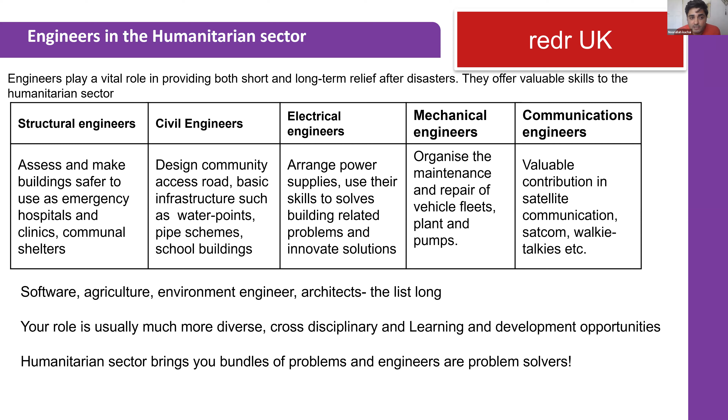Next one. How does it go?

Okay, so I started working as a shelter officer. I was providing houses for the displaced, internally displaced, and those who were returning back from Iran and Pakistan to Eastern Region, 4 provinces, Nangarhar, Jalalabad, Kunar, and Laghman provinces. We were providing 2-room semi-permanent shelters. Semi-permanent, they are called because sometimes the affected families would want to return back to their place of origin.

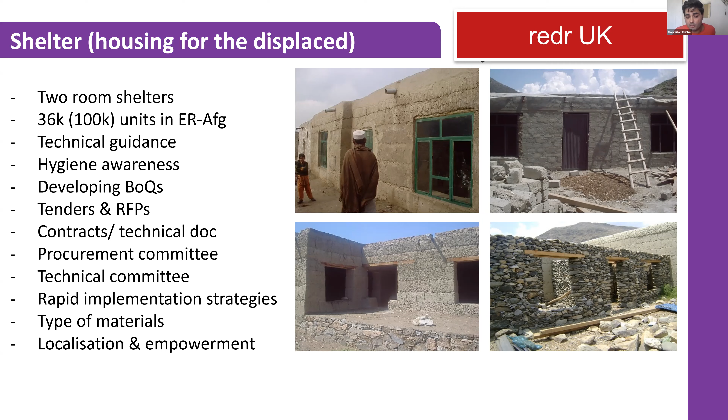So what you need to know is that when you're working with the aid agencies, you really need to have this rapid implementation strategy. Things happen rapidly, and you need to provide rapid response, quick solutions, and immediate action, especially in the first 72 hours. And the main focus of the aid agencies are mostly localization and empowerment. So try to use the local resources as much as possible, and try to enhance and strengthen the local skills that are available.

I was responsible for implementing several quick impact projects or cash for work projects that included several reintegration projects, protection wall, pipe schemes, water points, micro hydropower, school buildings, community centers, and women empowerment, GBV, and human rights projects. Now, why were we doing infrastructure projects in the villages? Because we were using the infrastructure projects as gateways to enter the villages, and then we could implement sensitive projects. You just can't go to a village in a remote location and say, oh yeah, here we are, we're going to implement a literacy project or a human rights project or women rights project.

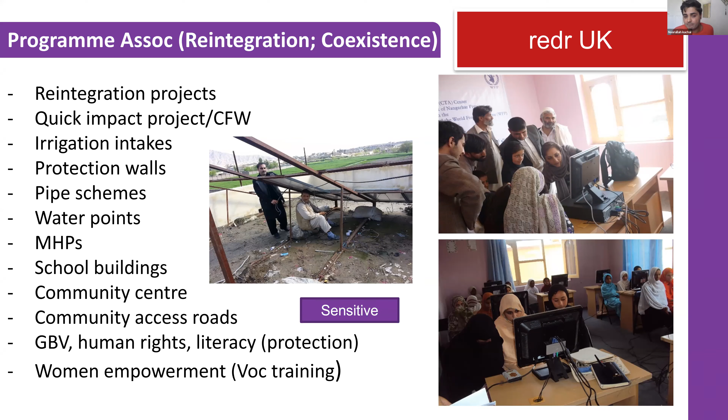So what you would do, you would go with a package of construction project or infrastructure project. You say, we are going to do this reintegration, irrigation project, but it has another component of women empowerment, and we are going to provide vocational training for women. So this will upskill the residents and the affected population, and it will bring them chances of livelihood opportunities.

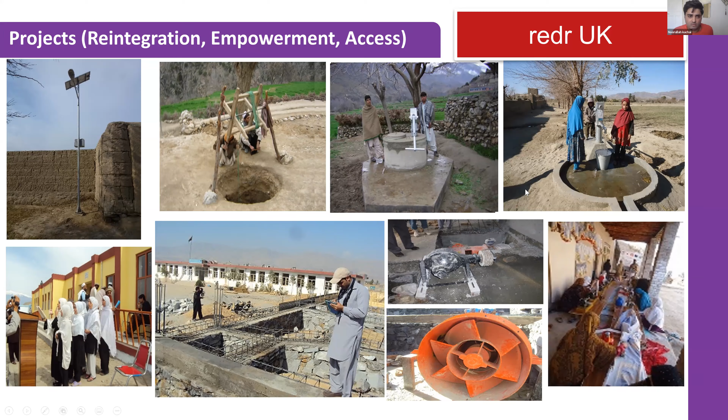I can't go next, yeah.

So as an engineer, sometimes there's a river, and the village is heavily depending on agricultural crops. So there's no water. So what you will do, you will do a feasibility study, construct a mini irrigation dam, and then the elevation of water will be increased, and then the whole village will have water. This is sometimes done as part of the coexistence projects.

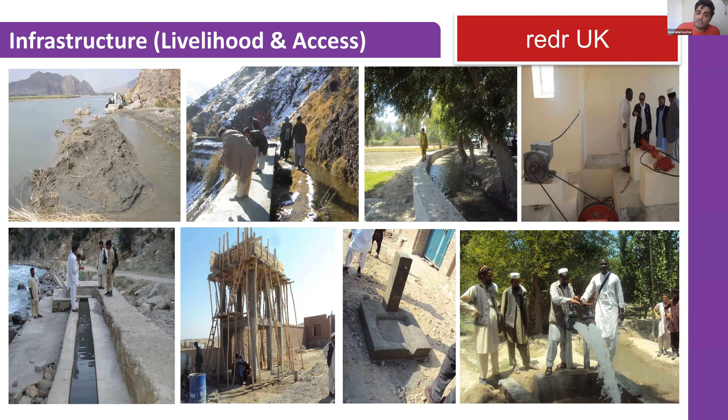For example, there is a village and 50,000 people are living, another 30,000 people are displaced from another location, and they are now living in the same location. So the resources are already stretched, and it's even more stretched because of the new displacement. So as you increase the amount of water, you increase job opportunities, and you are trying to bring community coexistence in the village. This is one of the examples.

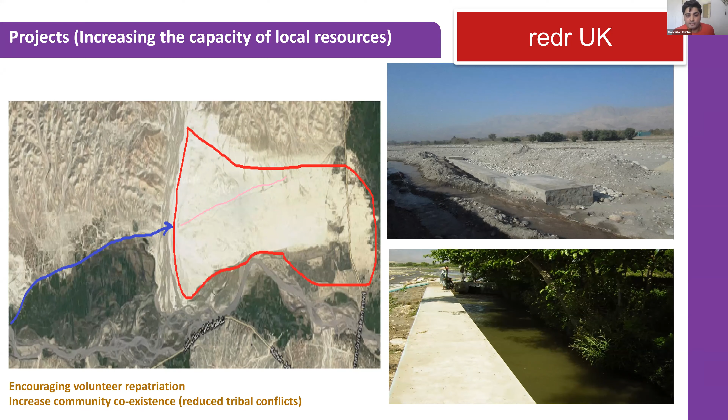So why would you choose the aid agencies? Why infrastructure? Well, with the aid agencies, when you are working, yes, you are getting a salary, but you're also bringing a smile to the people who have already suffered, and they have suffered a lot. They have lost everything, and you can bring that hope. You can bring that smile to their faces with your skills. You can work in a construction company, you can work for someone, and that's your choice. But if you work in a humanitarian agency, it is very satisfying.

You will directly or indirectly ensure sustainable reintegration of the communities. You will fight the further displacement and movement of populations around the world or within the countries. As predicted by IDMC, by 2050, there will be 1 billion people displaced around the world. It's because of the climate emergency, climate change, and also the conflicts. And there are many other parameters that they have taken into account. So we all can play a part in trying to reduce displacement, trying to help people, and engineers can play a vital role in the humanitarian sector.

So yes, you can use your skills as a gateway for sensitive projects as well. You can use your skills for helping needy people in ways that you might have never thought. Your discipline you might think is not related to the humanitarian sector, but there are a lot of opportunities for every discipline in the humanitarian sector. So I'm sorry, I'm talking a bit quick because there's so much to share and I'm trying to cover it, and please do ask. And if you want more information, please do get in touch.

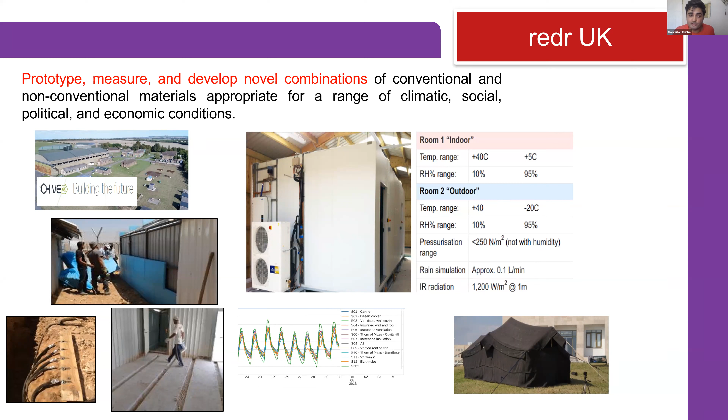The photo that you see with the air conditioners is actually a climate control chamber. You can prototype your design and then test it from -20 degrees to +40 degrees. We used these climate chambers. We built 12 shelters in Zaatari and Azraq refugee camps, and we investigated using several data collection methodologies.

In work package 5, we investigated the material flow and knowledge flow in displacement when the shelters are built by the beneficiaries themselves, or if they are assisted by the aid agencies. Where do they get the material from? Where do they get the information on building, and where do they get the designs? So we used social network analysis to investigate the material flow, and we used SNA as a tool of visualization.

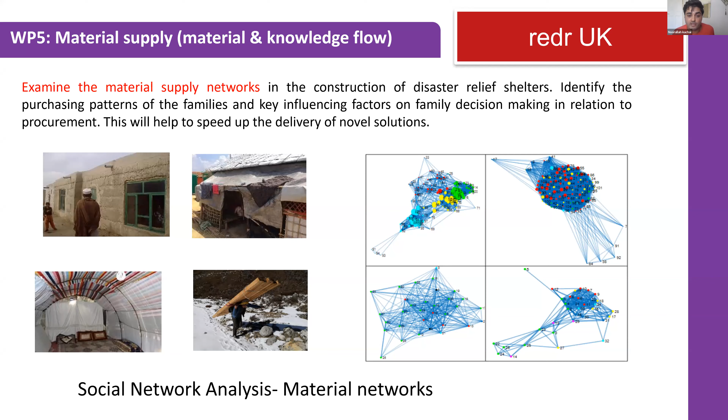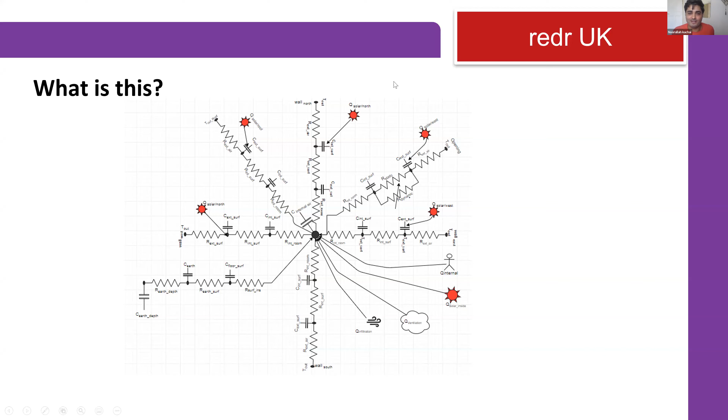The cause of displacement is divided in the literature into natural disasters and man-made disasters, but actually for me, both are man-made disasters, or it's all the consequences of our actions. If the wildfire occurs, if the flash flood occurs, or probably the earthquakes, which we don't know yet. So once people are displaced, they're categorized into 4: refugees, IDPs, asylum seekers, and stateless.

Refugees are those who cross international borders. The IDPs are those who don't cross international borders, but they are displaced from their own locations, and they are in a similar situation to refugees in most cases. The difference between an asylum seeker and a refugee is just administrative. So until it's decided that you are granted refugee status, you remain an asylum seeker. I was an asylum seeker for 1 year in the UK until I was granted refugee status. Stateless are those who do not currently have a government, and this is very political, and I will not go into this.

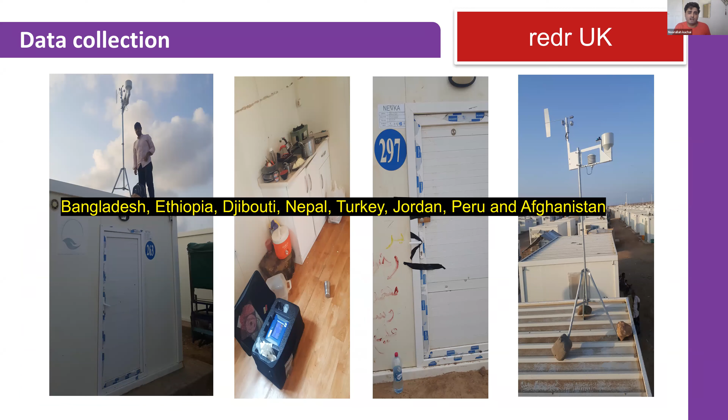I went to Ethiopia, Djibouti, Turkey, Jordan, and we collected data remotely from Afghanistan. The photos you see are from Djibouti only. These were the devices used. iButtons are sensors that are used inside the houses or inside the premises or shelters to collect temperature data. Heat stress is also a similar thing, but it's handheld and you can take it with you while you're conducting thermal comfort surveys or winter thermal comfort surveys.

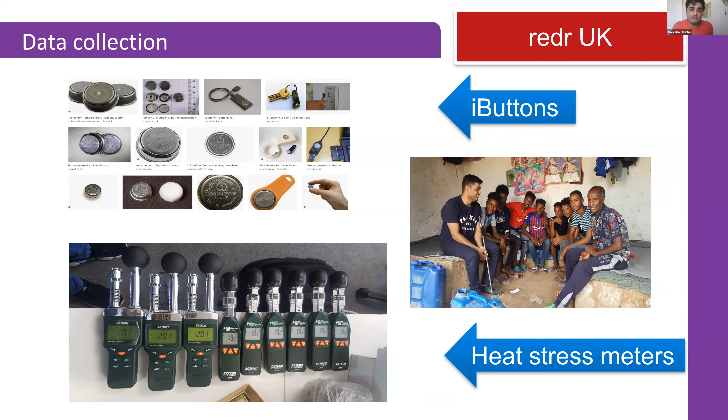They're all aligned, 8 of them, because I wanted to check which one is more precise, so I can take that one with me. So there comes the software and also the mechanical engineering. These were other devices. DustTrak is used to look into air quality. Also the tubes, I forgot the names. They are used to look into the particles in the air.

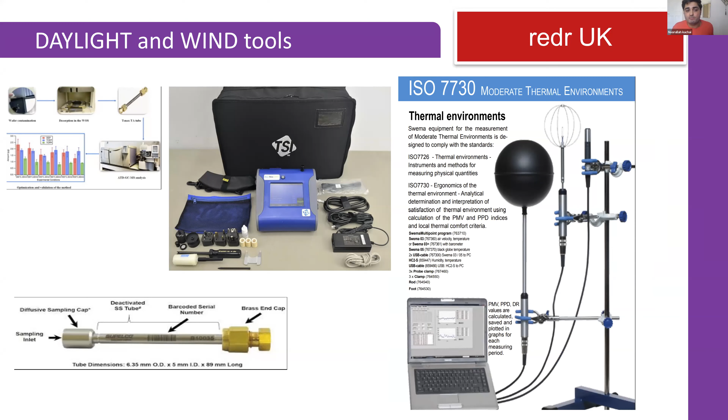Then I reached a point that it's actually not about the design. I was thinking the same as others were thinking in the industry or in the sector. The humanitarian sector was overwhelmed with the number of designs that are proposed, but no design tools. So I started thinking, okay, there's need to administer or inject engineering, the science of buildings, into the process. So if you refine the process, the product is going to be refined automatically.

This is why we started constructing easy to use tools for different and very important aspects of refugee house design or shelter design. 4 tools are available on the website. I will provide you the link. They are the environmental impact calculation, the thermal model, the structural stability calculation, and also daylighting. So how do you integrate the sciences? You provide these tools to the humanitarian aid workers. They will use them and they will integrate the science into the design process.

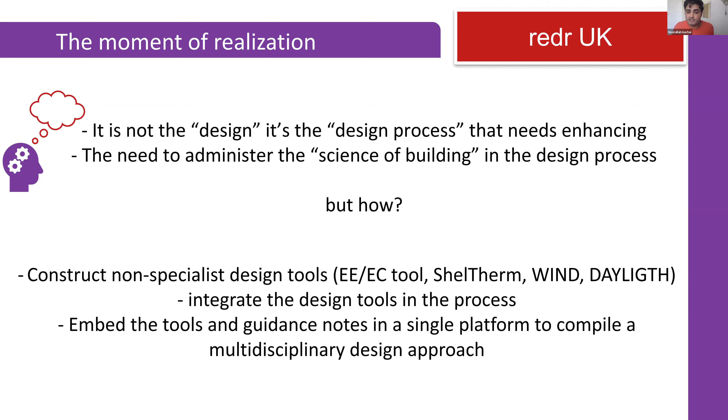So one of the things we did is integrate all of the tools into one platform that we call SAM, the Shelter Assessment Matrix. The unique part of SAM is that the needs of the displaced are integrated as the input in the tool. So subconsciously, as you are doing the design performance assessment, you are taking into account the needs of the displaced in the whole process. And it brings multiple disciplines into one platform: the social cultural aspects, the political aspects, the engineering, and then supply.

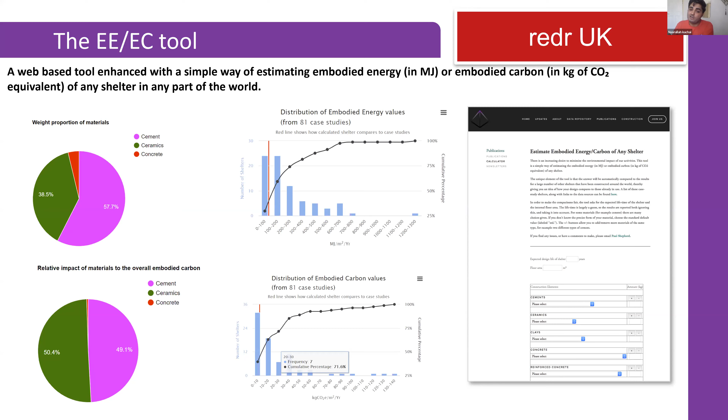The second is a very beautiful tool, ShelTherm. It's a universal thermal model for shelters. You can assess any shelter design model, and it has a material palette inside it: weather files for 3,000 locations are embedded in this tool with 1,200 combinations of materials. So you can choose different types of material and window location, cross ventilation, single ventilation, roof, floor,

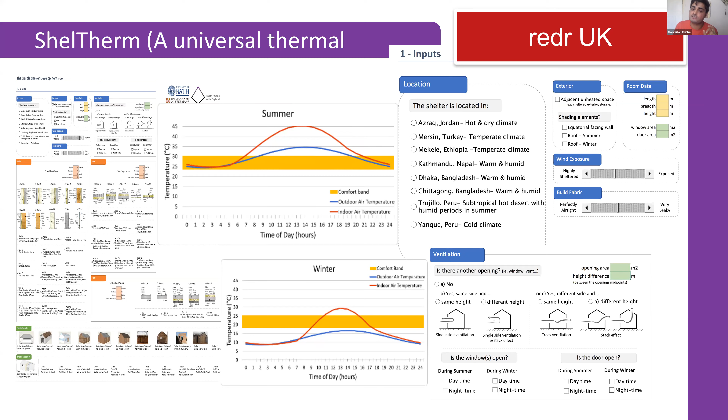all these by just the click of buttons. You just need to click radio buttons and it will tell you how good or bad the design will perform in the worst days in the whole year: in the summer, the hottest day, in the winter, the coldest day. And it will tell you if the design is actually making the situation better or worse for the refugees or the IDPs.

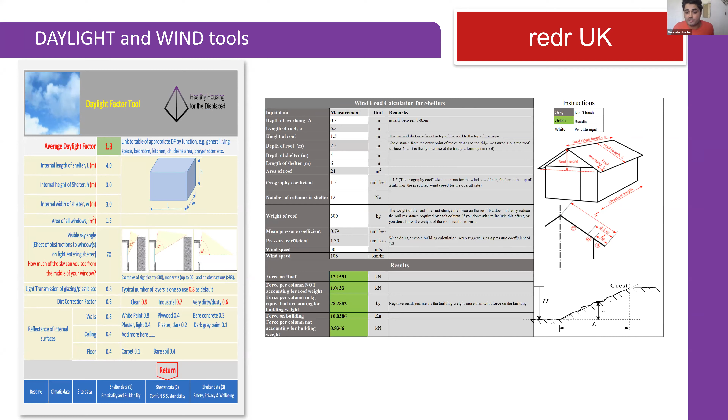The tool on the left is a simple spreadsheet where you need to provide 3-4 inputs, and it will tell you the daylight inside the shelter. The tool on the right will help you calculate the structural stability. This is based on the formulas provided by Arup. It enables you to understand how much pull resistance will be needed from the foundations of a shelter, particularly in places like Bangladesh, where typhoons occur and lightweight structures are constructed, so they can be blown away by typhoons very easily.

So SAM basically has 9 design criteria and 34 key design issues. These 9 design criteria and 34 key design issues are backed with tools that I showed you, 4 of them, and also 2-page guidance notes. So if you do not want to use them, there are 2-page guidance notes that will inform you about a certain design or key issue.

For example, if you do not know about the air quality inside shelters, there will be a 2-page document, the cream of the whole package, that you will read, and it will tell you what consequences it can have if the displaced are given stoves that are run by kerosene.

I will now play a video. How long do I have? Okay, I want you to look at it. I hope you can hear it.

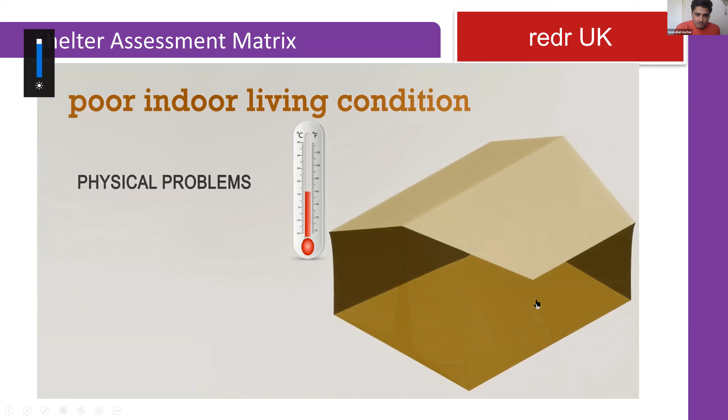Millions of people are forcibly displaced around the world and are encamped in temporary shelters, often for more than a decade. Unfortunately, many of these shelters provide poor conditions in which to live and raise a family. Some of the problems are physical. For example, temperatures above 40 degrees centigrade in shelters in summer and below freezing in winter, or dangerous air quality from cooking on open fires with no chimney, or insects attacking the structure. Some are cultural, such as the use of low-level windows allowing men to see into female areas, or the lack of separate male and female entrances. Others are security-based, for example the use of materials that are not knife resistant.

The Healthy Housing for the Displaced project led by Bath University has studied the conditions provided by shelters around the world and asked the displaced how their accommodation might be improved. The results have been enlightening. The constraints of cost, time and materials make creating ideal living difficult, but we have found that by applying some basic building science and attending to the local culture, lives can be transformed. By discussing the problem with our aid agency and architectural partners, it became clear that much of the issue was due to there being no structured processes for developing shelter designs that considered these physical and societal concerns. The guidance that existed was scattered, and lessons learnt were often lost before the next project. However, we also discovered that agency staff and architects would welcome a process if it were supported by the tools needed to analyse the situation and any proposed design.

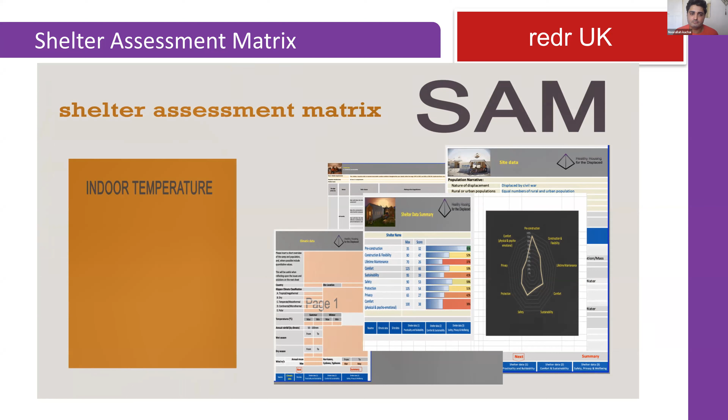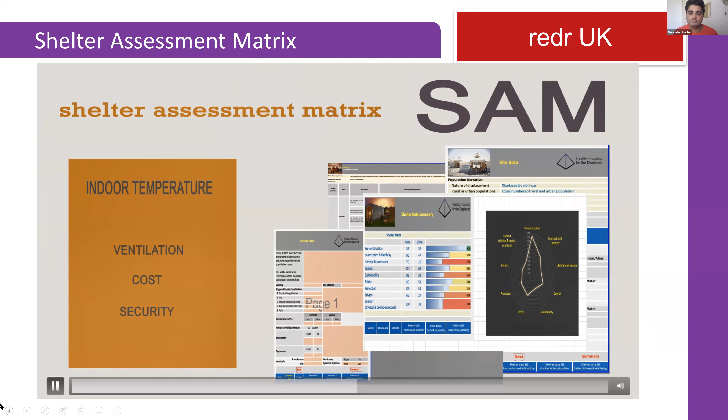In response, we designed the Shelter Assessment Matrix, or SAM. SAM is a simple spreadsheet supported by a series of computer tools that predict the performance of a shelter. For example, the likely temperature within the shelter in winter and summer in a specific location. SAM also contains a set of short information sheets that discuss the various issues for those new to shelter design on topics such as ventilation, cost and security. SAM can be used by aid workers, designers or architects to: 1. Inform design, 2. Upskill staff, 3. Help write tender documents, 4. Score tender responses, 5. Identify issues, and 6. Improve designs. SAM operates using 34 key issues that our research has shown to be critical.

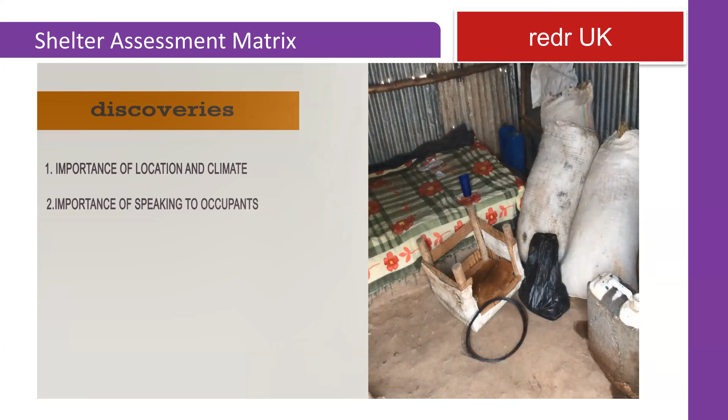A central discovery by the team is just how important location and climate is, and just how much of a difference it makes to speak to the occupants, or those from a similar setting or group before designing. This might seem obvious, however our work has shown that architects can have a tendency to think that it is possible to design a shelter that will work in the majority of settings without fully considering the impact of climate, or that different displacement settings have very different budgets, or that the displaced are not a homogeneous group, or that certain materials might not be allowed in some settings. In addition, aid workers can sometimes overly rely on knowledge from previous projects in very different settings.

Key to SAM is that it first asks the user to think about the requirements, i.e. the setting, the occupants, the costs, and the thoughts of the host government, etc., then to input the details of the shelter. The shelter is then scored against the requirements, so it is the match between the setting or context and the shelter that is analysed. As each of the 34 issues is considered separately, the user can quickly identify weaknesses or potential improvements. SAM can be downloaded from our website www.hhftd.net and is free. We hope you find it useful.

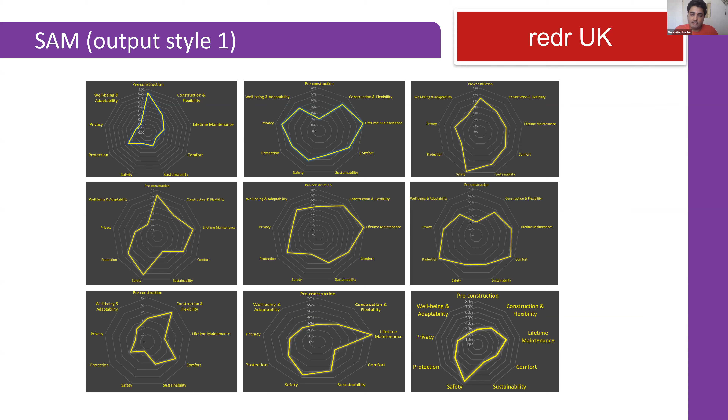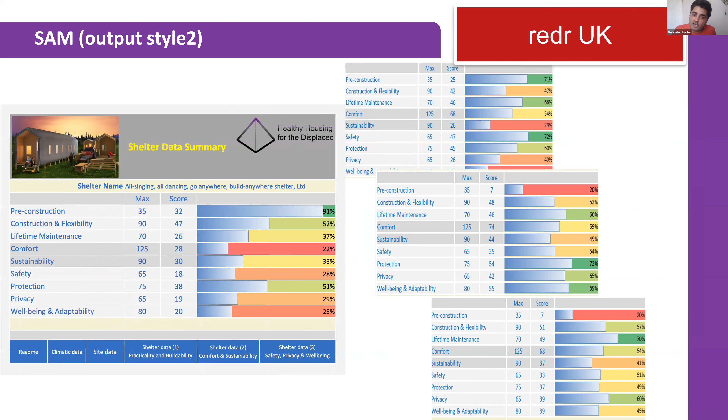It's performing very good in terms of safety, but it's not performing very good in terms of pre-construction, well-being and adaptability. So it's difficult to construct it actually, but it provides good safety. So then you as an aid worker have the knowledge, the information to choose or change a design. It also presents the output such that there's this traffic light system that tells you where the problem is, so you can work on that problem and solve it, or modify the design so it's more acceptable to that particular context. So it enables contextualized design performance assessment.

When I was presenting for a group of students, they never thought that the knowledge they gained in the very first years of their degree will play a significant role in changing lives. So whatever discipline you're doing, like RC networks, it's more electric, but we used it as a thermal model, and you can use this to calculate the heat exchange in a building, in a shelter. So I will see who got the right answers later.

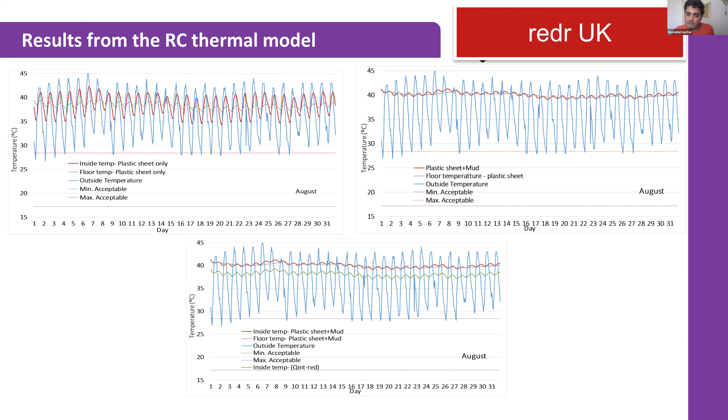So that is the model. This is how it looks, and this is what it produces. So this is the same shelter design, but the parameters are changed. You have seen the parameters on infiltration, ventilation, resistance, and thermal mass. So in the one where we added thermal mass and ventilation, the indoor temperature immediately dropped down 5 degrees. So it's predicting correctly. So you can use whatever skills you have. There's always an opportunity in the humanitarian sector.

I have co-authored 7 research articles. 4 of them are published, 2 accepted, and 1 is submitted. The first one looked into the role of computational and IT tools in disaster relief shelters. The second one, we investigated the environmental impact of shelters around the world, and we published a tool for that. The third one is about air quality. We went to many refugee camps, investigated the air quality in shelters, and we submitted that paper.

It's available online. The fourth one, we used social network analysis to investigate material and knowledge flow in disaster and post-disaster reconstruction. The fifth one is about the structural stability of shelters. We have published that tool, which is based on the formulas provided by Arup. The sixth one is the thermal model, which we call ShelTherm. It's a thermal model provided for non-specialists, and you can evaluate the thermal performance of any design in one of those 3,000 locations.

And even if the material palette does not include it, you can still provide your U-values, and it will calculate the indoor temperature and tell you if the shelter is performing good or bad. The last one is SAM. I tested SAM as a pedagogical tool platform with 72 aid workers to test if it could uplift the knowledge of users. We did a test before they used SAM, they were given time to read through the contents, the guidance notes, the tools, and then we did another test. There was a 14% uplift in their knowledge regarding key design issues of a refugee house.